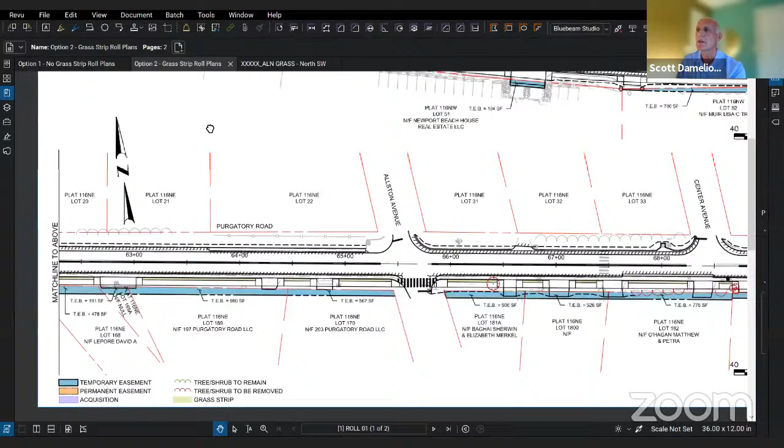So if we come up and look here, starting at Aquidneck Avenue and moving east, we start picking up the sidewalk at the existing sidewalk and carrying it easterly. We start out, in both options, with this little grass strip as the roadway narrows.

We felt that, whether there's a sidewalk or not, having this little piece here where there's a little grass strip, just because the roadway narrows there, if for some reason someone happened to get a little too close to the curbing in that location, it would be a better situation to have people have a little grass strip there, a little buffer.

So as we look at this beginning piece, you'll see there's a couple of little blue spots at these particular properties, that's where we're doing a little bit of driveway work and sidewalk work. This property here and this property here have a fairly wide sidewalk and driveway. It's kind of in the public space realm at that area. However, it's not really public, and we need a temporary easement to fix the sidewalk and driveways there.

Same as across the street here. This is just an easement to come in and repair the driveway after the sidewalk is installed.

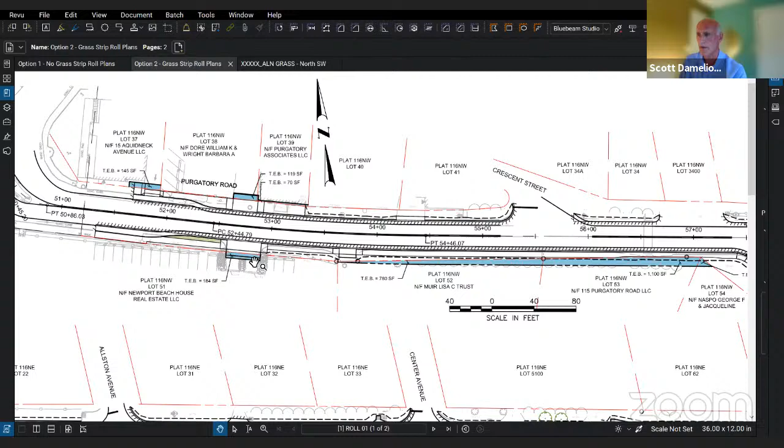As we move easterly, you'll see this dashed line here, if you can follow the hand, that line is the anticipated line of impact by the project. And you might say, well, why do we have to have this temporary easement if the impact of the project is over here by the sidewalk?

Ron had alluded to this a little bit: we need a little bit of space to be able to manipulate workers and equipment in order to facilitate the construction of the project. So in general, you'll see that we have a 3 to 5 foot offset from the actual work line to allow the contractor and his men to construct the project as it's shown.

So in this particular location, let me zoom in a little bit - the sidewalk comes through, the easement, the sidewalk is built, the limit of grading is still within the roadway right of way. However, we have this temporary easement that comes along to allow construction.

When you get to the very easterly end here, just before Tuckerman Avenue, if you look closely, we had to narrow the sidewalk down from 5 feet to 4 feet because the property line becomes so close to the sidewalk, and we didn't want to have the sidewalk on private property.

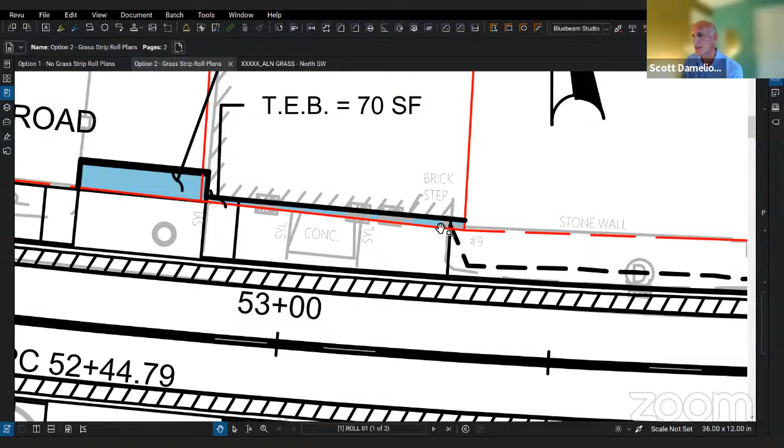I'm going to go back to this corner over here just because you may not have noticed, but if you really zoom in here, we have a very small temporary easement of 70 square feet to be able to reconstruct the sidewalk right up against that building.

So we continue easterly. We're able to construct the sidewalk, keep it within the right of way. And we have a temporary easement to be able to construct the grading, at the back of the sidewalk. However, we are not able to get the grass strip in this location.

As you could see, if we had a 2-foot grass strip here, we would be forcing the sidewalk onto private property, having to have a property acquisition, and that was not in the scope of the project.

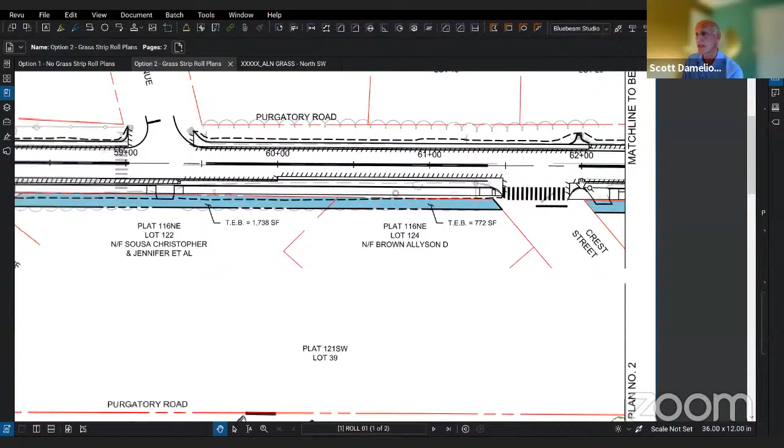So here we're going to shift down to this next match line. And once we hit this match line, we were able to start a 2-foot grass strip. This is a 2-foot grass strip that we've installed.

We were trying to get a 3-foot grass strip. However, as you see, if we had a larger grass strip, the sidewalk would have gone onto private property and would have been out of the scope of the project once again. So we have a 2-foot grass strip, 5-foot sidewalk, and we show this temporary easement coming through this area.

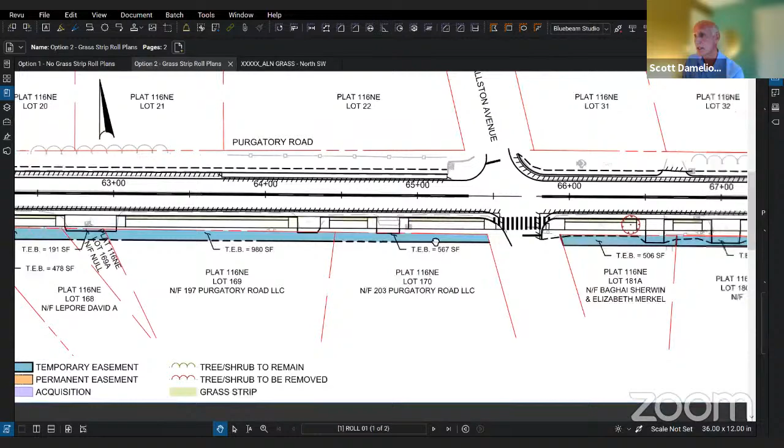As we're going through, you may notice that quite often the proposed sidewalk is following the face of utility poles. You'll see right here, this is a utility pole, and the back of sidewalk generally follows the face of the utility pole. That gives you an idea when you're in the field as to where this might be.

As we continue east, we run into this tree, which happens to be impacted by the project. My recollection is the tree is kind of misrepresented here in the plan view - it's actually back a little further, but the way it's grown is it grows out toward the street. The utility wires are running over here, so it's been trimmed such that it grows out over the street rather than over the property. However, the lower limbs do extend over the proposed sidewalk, so this tree would have to be removed.

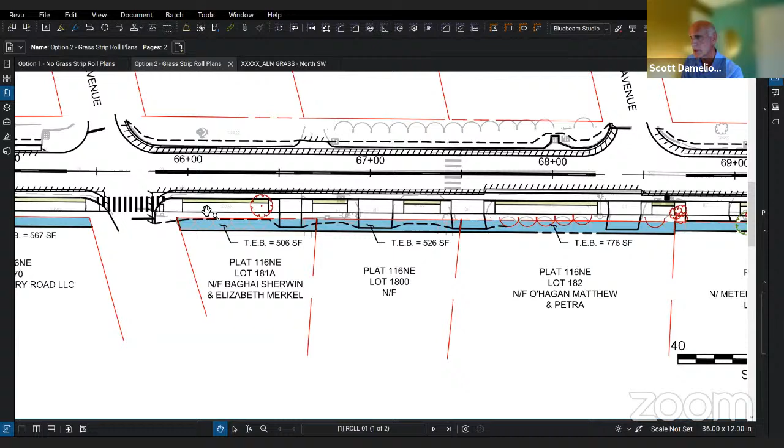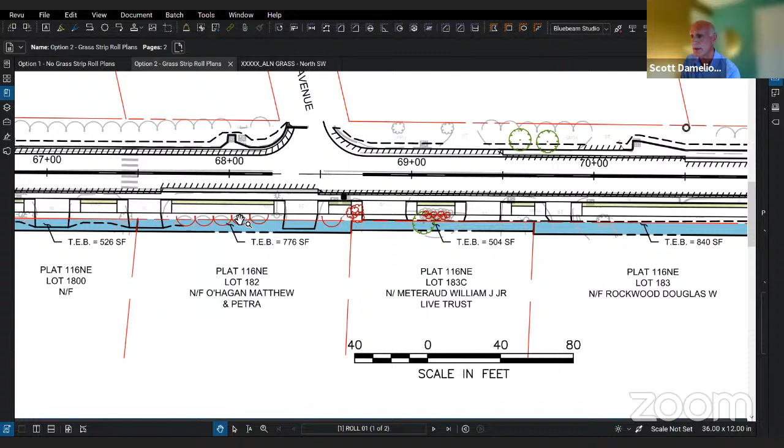As we continue moving easterly, you'll see that we have some shrubs that have been indicated for removal, some small planting flowers and things that would be impacted by the project. Most likely they'd need to be removed, especially these here that are in the sidewalk area or in the immediate grading area at the back of sidewalk. There are some others such as this here that are close but are not impacted.

And Scott, just to clarify, so those removals that you just identified, those are plantings that are on public property, is that right? That's true, yes. Okay.

As far as the shrubs go, in a lot of cases along the street, the shrubs are planted right on the property line, it appears. So in some locations you might be able to get a very strict trimming of those shrubs to allow the construction to happen. It's really difficult to say without having the equipment there and knowing how much the shrub has been allowed to grow over the property line. But a lot of the base of these shrubs appears to be right along the property line. Those are the large hedges.

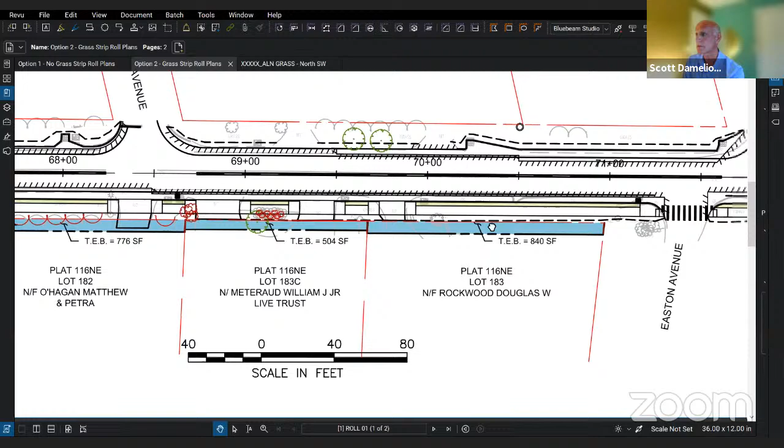So then we run into this particular location where we impact numerous trees. This was a concern that came up at one of our meetings. These are flowering trees - they're kind of nice in the springtime. We looked to see if we could try and save them. We weren't able to come up with a concept maintaining the sidewalk on this side that would save these trees, but we did have an option for consideration where you could potentially move the sidewalk across the street and come back. I have that option here.

So here the sidewalk would come across Wolcott. We'd have to cross Purgatory through here, go up the north side of Purgatory for a block, and then come back. That saves these trees on this side. Just food for thought and consideration.

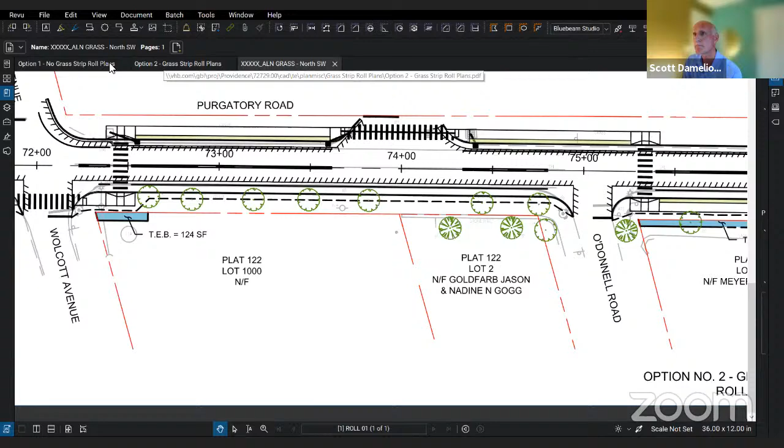As we come back to our plan, we continue down the road. We have a couple of trees that are very close to the right-of-way line. We feel that these can stay in place. As you can see, our limit of grading is just at the back of sidewalk.

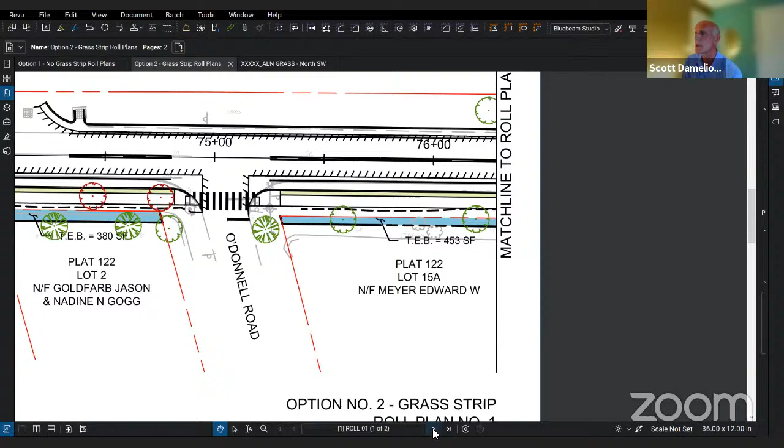Again, as we move east here, just before Kane Avenue, we have a couple of trees here which are in the sidewalk, in the back of sidewalk area. So what we've done is we've tapered the sidewalk in to be a 3.5-foot sidewalk, tapered it out, tapered it in, tapered it out, trying to save these couple of trees. We think we can do that. It is a very short impact to the sidewalk and allowable through ADA.

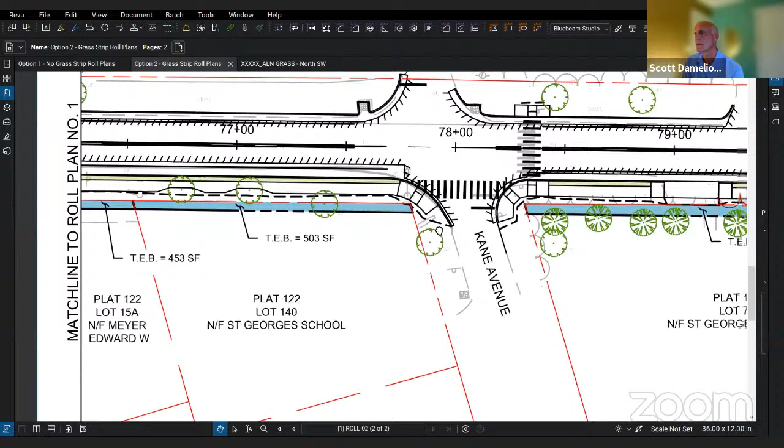We continue up beyond Kane, easterly. Just for those who may not be familiar, ADA is the Americans with Disabilities Act. So as we're constructing this public sidewalk, we do have to comply with ADA. That's what Scott's talking about. Thanks, Ron.

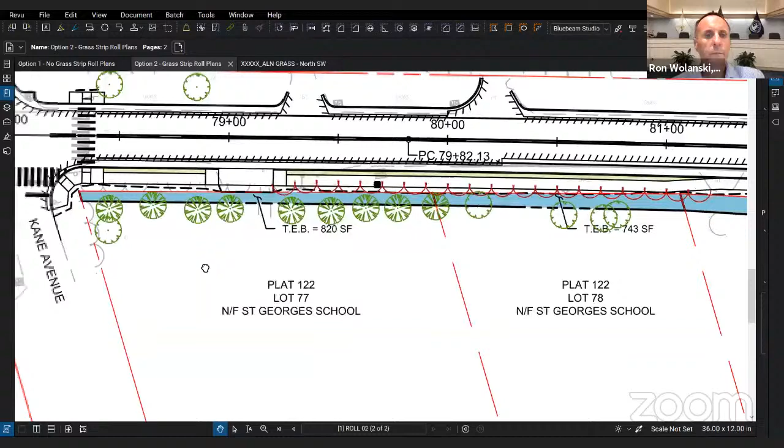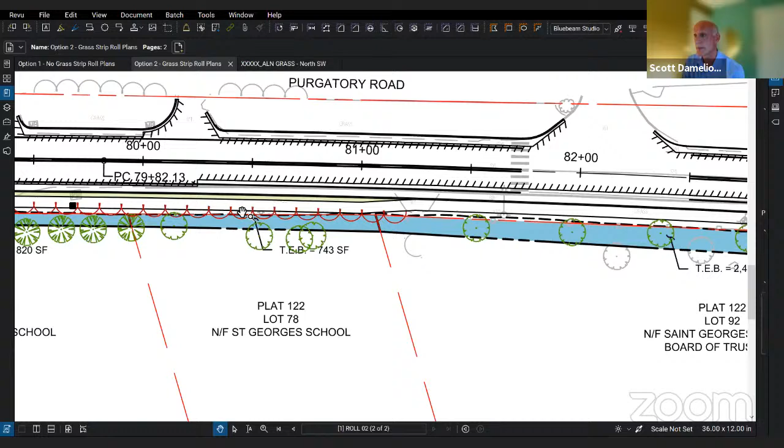Continuing easterly, now we're up towards St. George's School. Again, 2-foot grass strip, 5-foot sidewalk, the grading towards the back of the sidewalk. Through this area, we're concerned about this hedge that runs through here being impacted by the construction. Just beyond here, we taper it back out because we don't want to impact - beyond the utility poles, we would start running into some utility pole conflicts as we move easterly.

You may notice that the green temporary easement area here has gotten wider than, Scott, you said it was going to be 3 to 5 feet. It's gotten wider than that through here. What we've actually done is hold a 5-foot location here and taper it back to where we need it, and that's just a straight line. Generally with temporary easements, it's not that large a concern to make this a curved line that's 5 feet off, but if it needed to be done, we could do that.

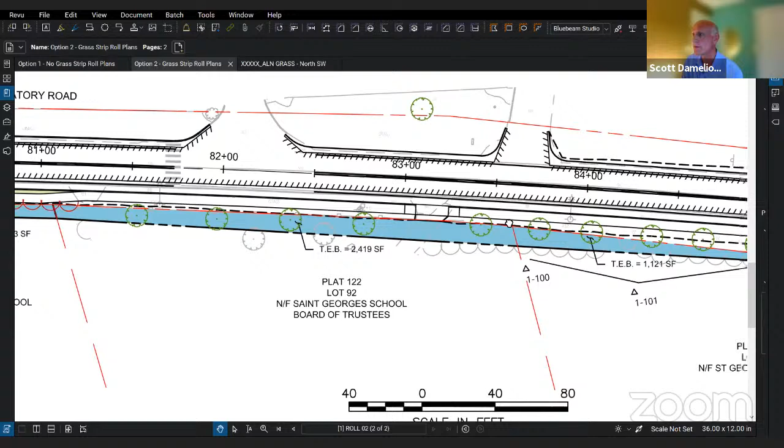So we carried the sidewalk through here, 5-foot sidewalk, comes down. You'll see here's one of the utility poles I was talking about. We're trying to avoid impacting a lot of utility poles. This one happens to fall within the sidewalk. We may need to relocate that. We have to get some more detail on that.

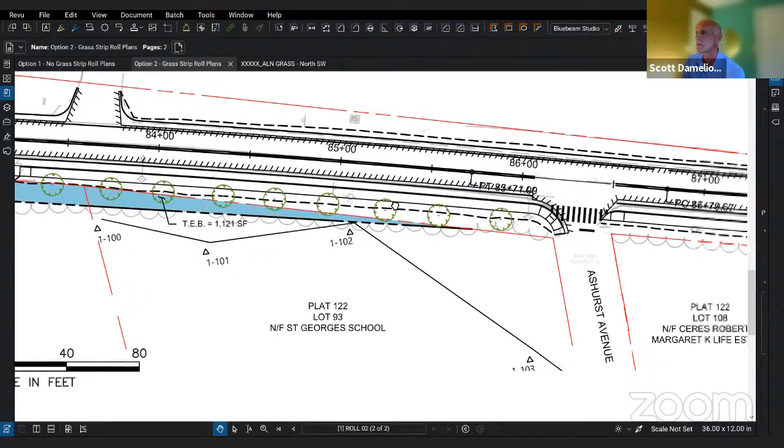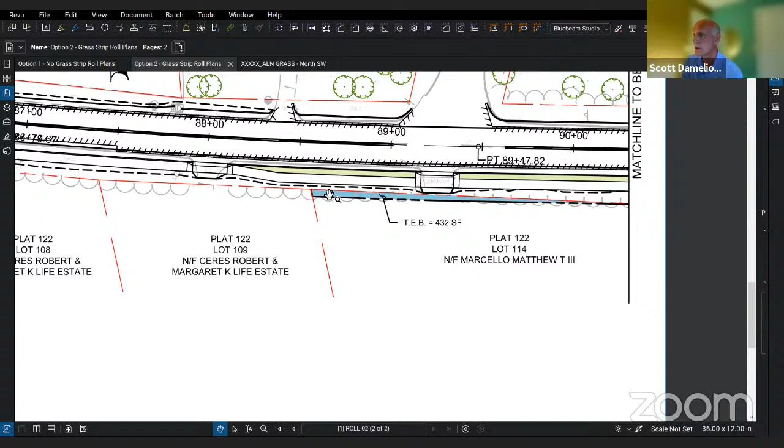And we continue easterly. So no need for temporary easements through here, we have room to work with. And as we really get down to the easterly side, this is where we start to get a 3-foot grass strip, so we're able to get the full 3-foot grass strip down in this end. We have room to do the grading we need to and just have a minor temporary easement for construction. And we move to this match line down here.

And you can see that we continue with this 3-foot grass strip and the 5-foot sidewalk down to the corner of Tuckerman. We have lots of available area for construction without a temporary easement. And then we match into the existing walking path that goes down to Second Beach.

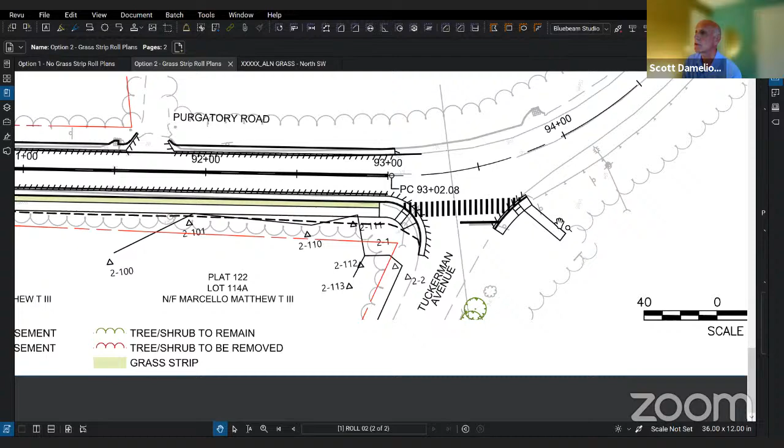Ron, any particular location there you think we glossed over too quickly that we should go back to?

Well, I think that we've said from the beginning of this project that we want to try to avoid, well, a couple of different goals. One was to try to keep the sidewalk on one side of the street. And early on, it was decided that the south side was going to be the most appropriate side of the street to keep it on. So that was kind of our starting point. And then, trying to limit the adverse impact on private properties and also on vegetation that might be in the public right of way, particularly trees. So that one area, that line of 7 trees that are right smack dab in the middle of where the sidewalk would go if we were to keep it on the south side of the street.

We heard at earlier meetings from folks in the area that we should do the best we can to try to save those trees, as Scott said. So we do have that option, or alternative, of going across Purgatory to the north side and running it to avoid taking out those trees. Not the best solution, I don't think, in terms of trying to keep everybody on one side of the street, but with competing interests, a decision will have to be made, and it's not going to be made tonight, and it's certainly not going to be made by any of the 3 of us providing this presentation. I think that's something that will have to be discussed, perhaps by the town council, along with the property owners in that particular area, to go on the north side of the road.

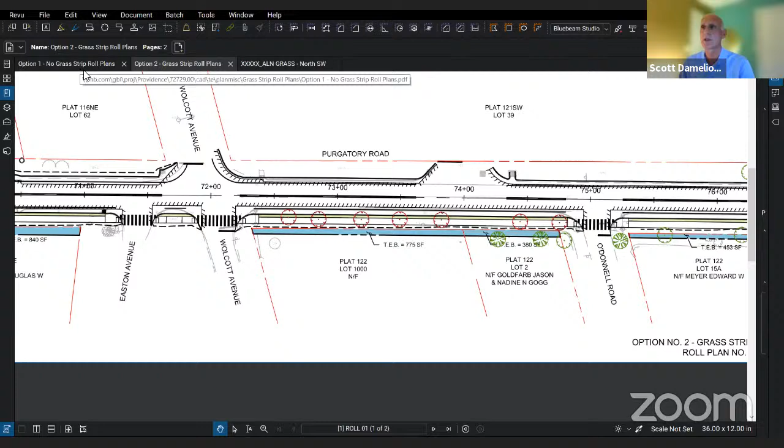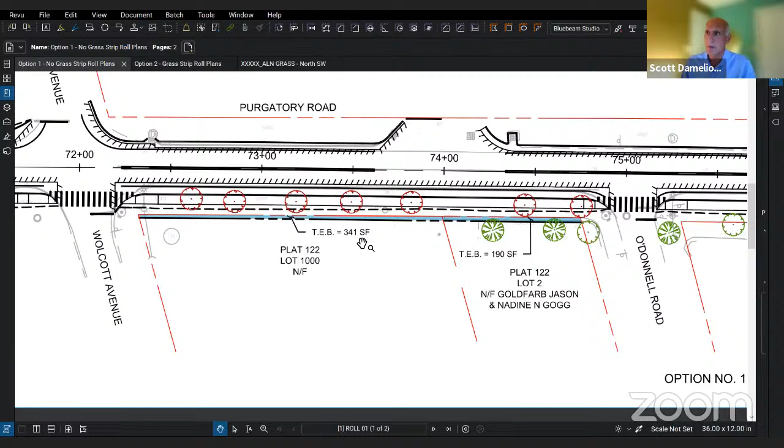I just want to note this is the grass strip option, which indicated some areas of impact for temporary easement boundaries. We also have this no grass strip option. Looking at this same area where these trees were, this temporary easement boundary is 341 square feet. If we go back to the one I was looking at, it's 775 square feet between the two options. So the no grass strip option, if there's no grass strip in front of that parcel, would have less impact on the temporary easement boundary. It doesn't mean we save the trees, but it would have a lesser impact, even though it's temporary.

I do want to note, while we are asking for that 3 to 5 foot area beyond our limit of grading to facilitate the work, that doesn't mean that property is going to be impacted other than being walked on or traveled over to work in the area that would be graded. That dashed line, the limit of grading, is the area where the actual physical work would happen.

So back to what I was saying at the beginning, our next step in terms of communication with individual property owners would be to identify, for each one, what we expect to see as an impact. So there may be properties where it's just workers walking on their property versus grading activity. Is that something we could identify with the plans we have now and communicate to those individual property owners what we expect to see happen?

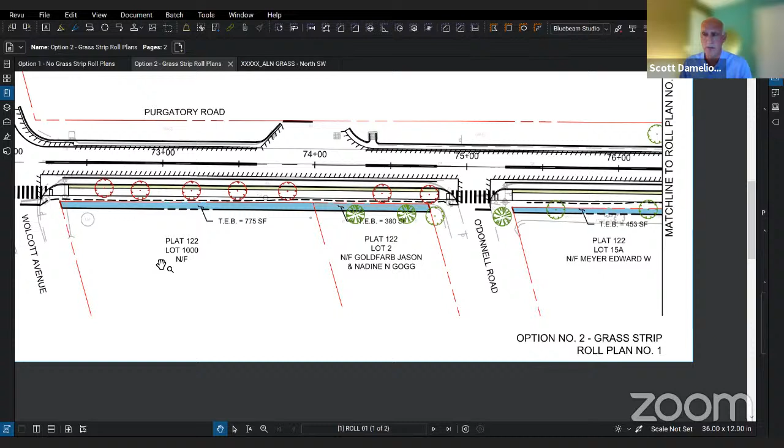Yes. We have maybe 2 or 3 parcels where we don't have the topographic information to finish that analysis. However, for the majority of the parcels we do have limit of grading limits, and we can show that as well as the temporary easement limit.

Okay, great. So as I said earlier, we'll be communicating with the impacted property owners individually, identifying particular impacts we expect to see and asking for your approval to access your property on that temporary basis. As Scott highlighted, there's going to be no permanent takings, so to say. There's no change in property lines, and there's not going to be any permanent occupation of private property as a result of this project. We were able to keep the sidewalk entirely on public property. It's really just these temporary impacts we're talking about, aside from the vegetation removal.

So with that, unless you have anything else, Scott, or Warren, anything you wanted to add? Nothing comes to mind right now, Ron.

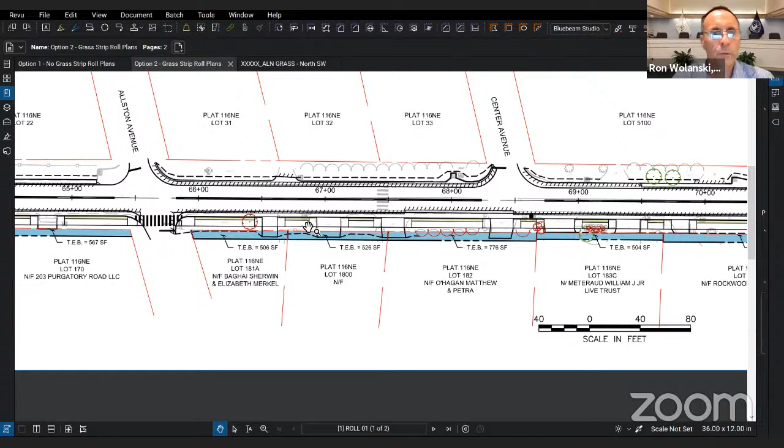Well, I'll answer for the mailboxes. The mailboxes would be relocated as part of the project. Okay, so you would relocate them, we would not need to do that? That'd be correct. Great, thank you. As far as the snow shoveling, the town has an ordinance that requires property owners to shovel snow from sidewalks along the frontage of their property, and I'd expect that would be the situation here as well. It applies townwide, so property owners would be responsible for shoveling the sidewalks unless the town were to choose to take up that responsibility. Great, thank you very much.

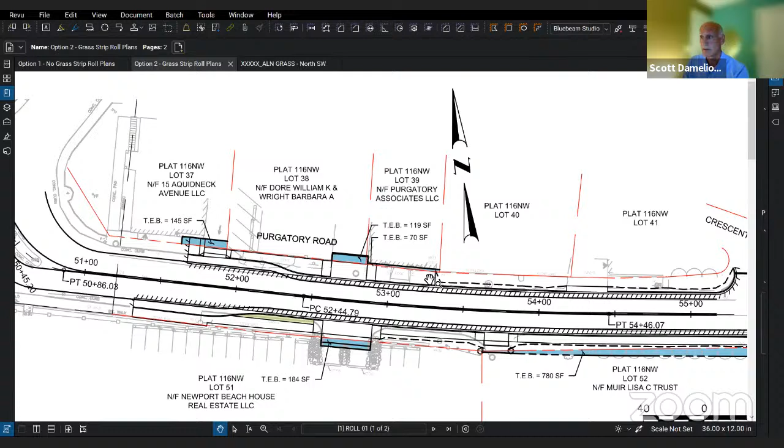Right, so we're replacing the sidewalk in this area where the existing sidewalk is, not extending it. Not extending it. Okay, gotcha.

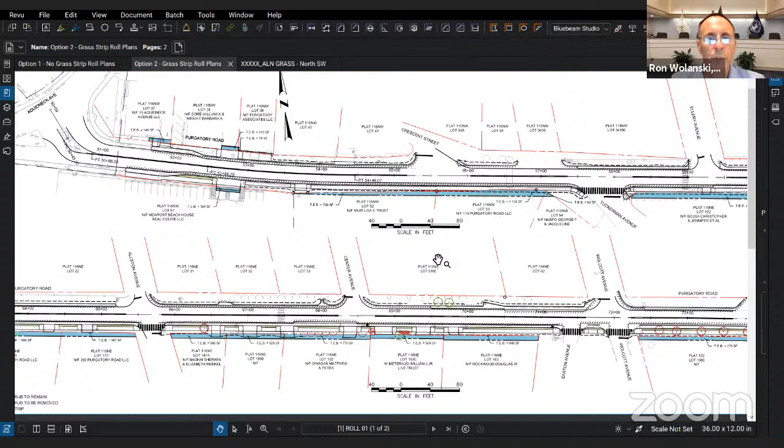So yeah, we've heard concerns about the maintenance. In this case, being a town road, I believe the town is responsible for mowing those areas along town roads. Of course, often the private property owners will, on their own, go out and do the mowing themselves, but the town would be the responsible party. We can discuss that further, and once this gets to the town council level, we'll have more discussion with them. As I said at the outset, the town policy is to provide these planting strips, the Esplanade style sidewalks, to the extent that we can.

That's something talked about many years ago, and we certainly want to honor that policy if we can, but open for more discussion. Terrific, and I agree, I think the concept is wonderful. We just have to look at the actual reality of it. But I do appreciate that. So thank you for letting me share that. Sure, appreciate that. Thank you. Thank you, Karen.

Okay, next is George Staples, St. George's. Go ahead, George. Hi, Ron. I appreciate the presentation and it looks great. I wanted to offer a comment for the property across from our lower road, where I think maybe Plan B is your suggestion of moving the sidewalk onto the north side. Scott, can you pull that up?

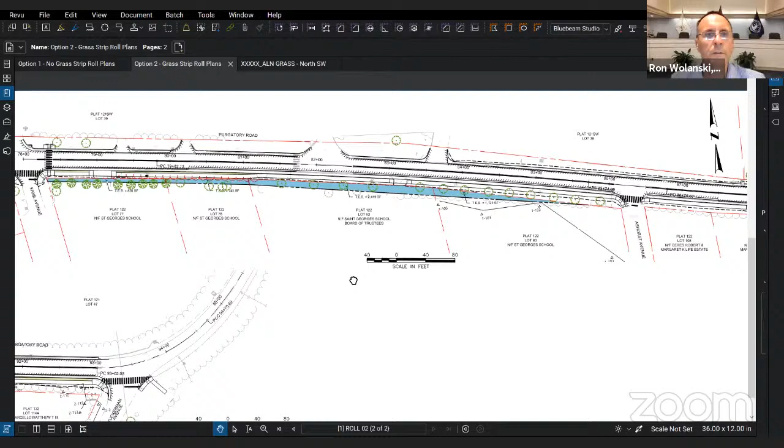The only thing I'd offer from a safety perspective is everyone coming out of the lower road, delivery trucks, general population, people who use the pool, the theater, who aren't living on campus, the tendency is to go right out of the lower road, heading west. They do a quick look left and then take their car and go west. And if pedestrians are walking up, we see a lot of runners trying to run against traffic, which is great and safe. Then those folks pulling out of the lower road who want to take a right and go west, there's often a lot of conflict with pedestrians. So I just offer that comment from a safety perspective.

If you decide to go that route, it's not an impact to us or the property that's there, but it's just something to think about with regards to a lot of traffic coming out of our lower road, people who don't necessarily live on campus, who would want to go west.

So is that, like you mentioned trucks, your service entrance? Yeah, that's like food trucks. Yeah, Sysco, delivery trucks, mail trucks, UPS, Amazon, Staples. Anyone who's coming into campus comes into that lower road. They usually exit west, taking a right out.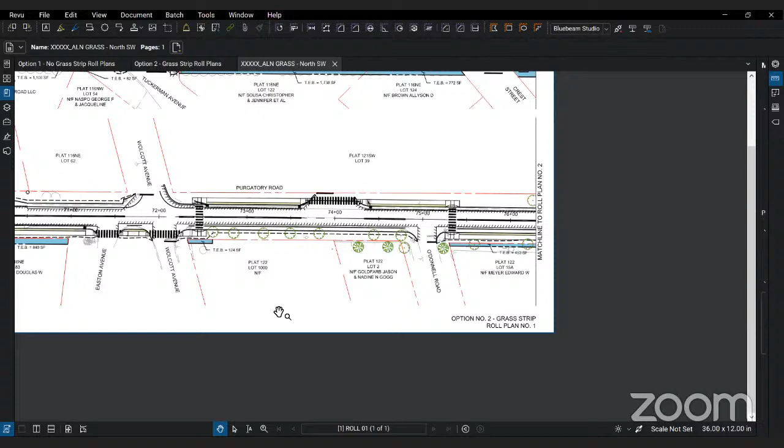And the tendency is to look for a quick left for oncoming traffic and go right. It looks like we're going to be pushing pedestrians to their right, which could be dangerous. So I just suggest a quick peek at that, or at least take a look at the traffic. We're happy to offer suggestions and meet on site to help. But it's something to look at from a safety perspective for people who are maybe visiting the beach, aren't familiar with the area, if they're going to cross the road and then come to what is a high traffic entrance and exit out of the school. Right.

Okay, everything looks great. I appreciate you bringing that to our attention. I wasn't sure exactly what kind of traffic was using that driveway. Do you have any thoughts on that, Scott? Good points, as far as trying to improve this. My first thought wondering about this particular area was, there's some new construction going on in this area that could be changing some of the circulation. I don't know if this is impacted or not.

So George, with the work you've got going on campus, does that change how that driveway is going to be used? No, everything's behind basically the stone wall and the hedge, so everything would remain the same for us. I think we've seen an increase of 300-400% of delivery via Amazon, and it's Monday through Sunday, so it doesn't slow down for the weekend. Giving the community access to the pool, the theater, maybe the field house, we have a lot of people coming in from a rental perspective, hopefully with COVID somewhat behind us. Just thinking out loud.

Certainly the visual of people walking across the street and the sidewalk on the south side of the street is much safer, but trying to bring them back. I'd also say coming over the hill there where that crosswalk would be, I see a lot of people wait on the corner of Wolcott and Purgatory on the south side, waiting to get across that street. I don't think there's a crosswalk currently. Right, and they could stay there quite a while as the traffic comes over the hill. I know the speed limit's on the lower side, but reality is most folks either leaving the beach, it could get a little dangerous. So that would be my only concern, pedestrians walking across the street at that point and then heading across a heavily traveled exit entrance.

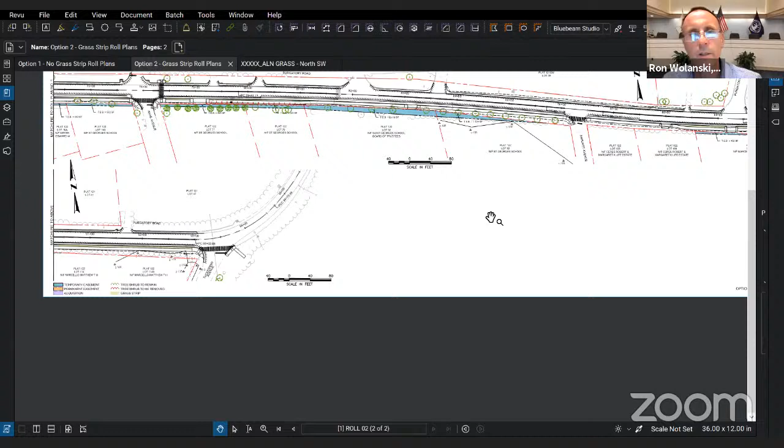Just to address a couple of them, I'm not aware that the town requires private property owners to repair sidewalks that are town sidewalks. There's the ordinance regarding shoveling of snow, but I'm not aware of anything else. Warren, do you know of anything that requires a private property owner to repair public sidewalks? I couldn't find any. I don't believe there's anything that requires private owners to repair those sidewalks. Those are ours to maintain the condition of.

And regarding the hedges, certainly the town does the best it can in keeping the hedges clear, and private property owners for the hedges that are on private property are responsible for doing that. But as you mentioned, Mr. Fugate, the town oftentimes has to contact property owners to ask them to trim their hedges. So that would be no different in this situation.

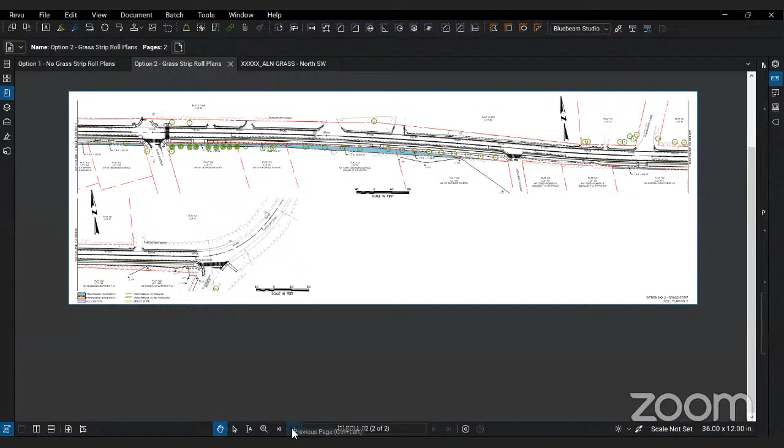I have the house belonging to Purgatory Associates, which is over at the Crescent Street to Aquidneck Avenue end. Let's give Scott a minute to navigate over to that plan that's by Aquidneck Avenue. So that's on the corner, I am lot 39. Right there, plat 116 Northwest, lot 39. And I'm just unclear what you are going to do right in front of that, because it's a residential and a commercial space. Over the years it's just been the parking area for the commercial space, so there's not really a sidewalk in front of there.

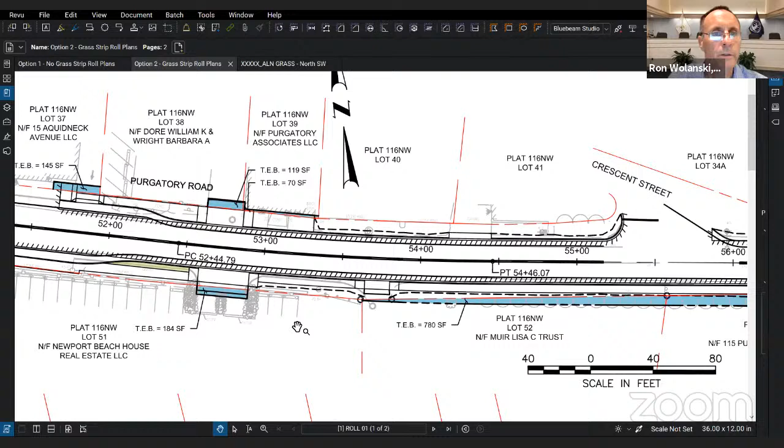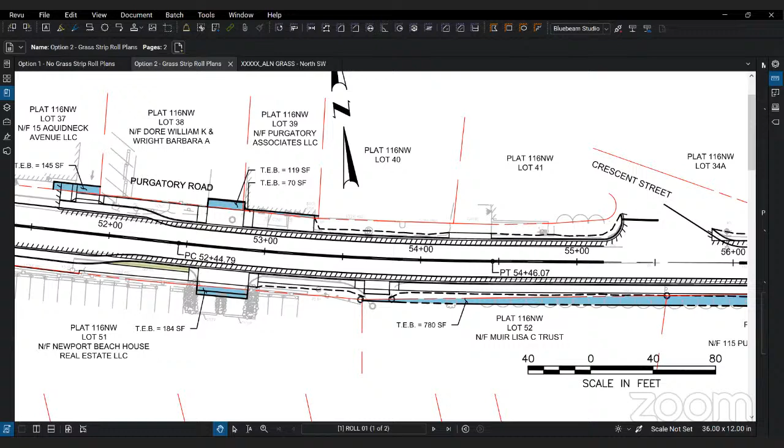So Scott, is that the area you said we're not going to get into? No, at that location we're proposing to place a sidewalk. At least at this point in time it was a case of replacing more or less in kind. However, we would put in a curbing which would somewhat impact what Deb is talking about as parking. Right, it would leave no parking for that commercial spot.

So I think we've talked about this particular area. Mr. Ortiz brought up the concerns along his property as well. So we've been talking about this for quite a while, what we do with that particular stretch, and whether we need to, since the sidewalk is going to be on the south side of the road through there, look at the north side in that particular stretch. So I think it's something we can certainly look at some more. Yeah, I'd appreciate it. Hopefully at that point nothing would have to be done right there. Right, yep. I'm familiar with what you're talking about, I can picture it in my head.

The pavement goes pretty much right up to the building and it's used for parking. Yes. Okay, well I appreciate that. And it may be that we avoid that work on the north side in that particular area if it's not necessary, but we'll certainly talk about it some more. All right, I appreciate it. Thank you. Thanks for calling in.

Okay, next on the list is, I'm assuming this is John Bagwell. It says Lee Bagwell, but John, is that you?

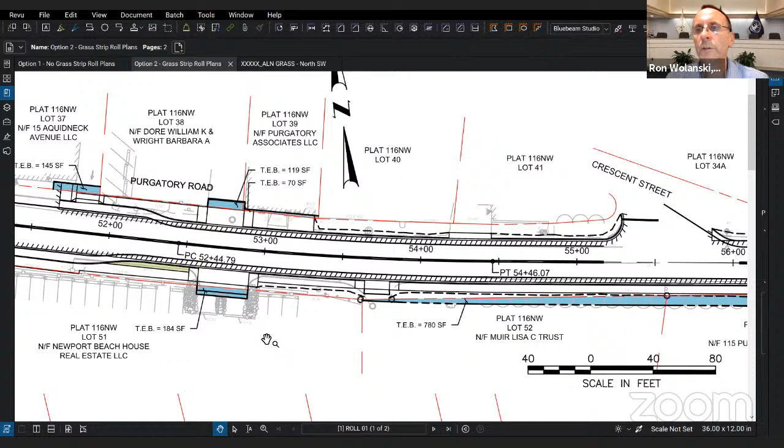Hi John. So I guess until you see this kind of plan laid out, you don't have any sense of the detail you have to go through to make something like this happen. People see a sidewalk and think, oh, you just put the sidewalk in anyway. Thank you very much, very technical, very professional.

My comment is, frankly, I drive this Purgatory Road several times, sometimes several times a day, and the thought of people crossing the street is really a little scary. I second the comments about driving that at sunset. I did that the other day, the sun was in my eyes, I couldn't see a thing. The problem is the people are crossing the street, the sun is at their back, so they're not aware that the drivers are blinded.

Frankly, I think it's a matter of saving lives or saving trees. I don't want to oversimplify it, but crossing the street on Purgatory, you'd save the trees, but I think it puts people into significant danger. People would wonder why they have to cross this, then go back and cross again, twice at risk in the traffic, unless you get into elaborate crosswalks and signs, which is now a very pretty lane almost. I think it would be a real mistake to do anything except keep the sidewalk on that south side of the street. Thank you, Ron, for giving me a chance to express my views.

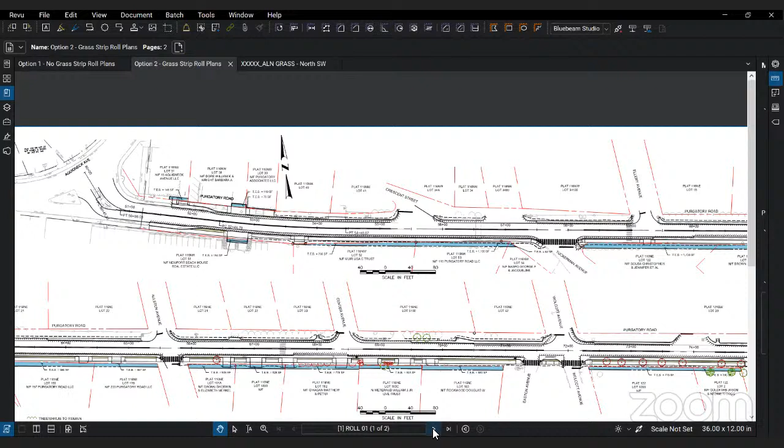Sure, thank you. Yep, thanks Karen.

Warren, not to put you on the spot, but are you aware of any discussions that might have gone on about that particular intersection there?

No, only the addition of the crosswalk and the signage associated with the crosswalk and share-the-road type signs. But I don't know, I could check with Pare Corporation, they're doing the traffic studies for us. We have 4 ongoing right now, so I'll check with them and see if there's anything we can do about that blind spot. I agree with everybody, John and Karen, about that area coming around the curve at sundown, it's right in your eyes there. So maybe there is some signage or warning we can give to them. I'll get back to you on that.

Great, thanks Warren. You're welcome.